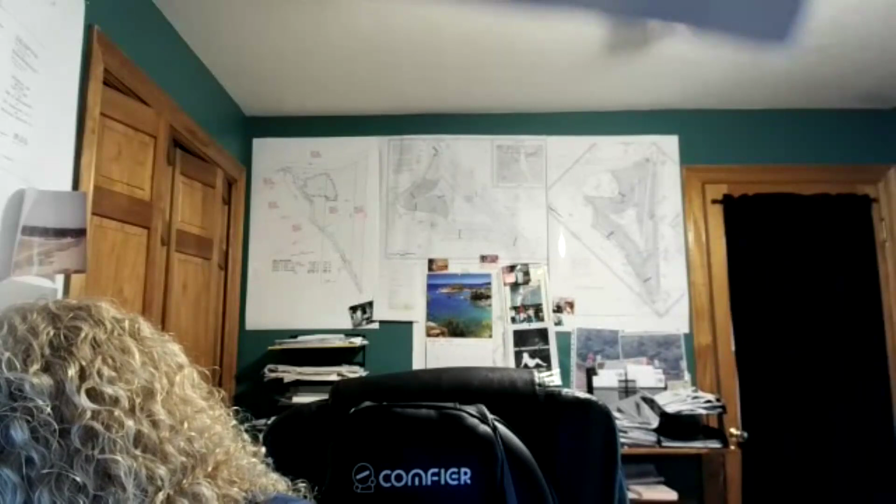The property is identified as Assessors Map 88, Lot 23, 815 Bedford Street. All interested persons are intended to come. They are now legally open, and the bandstand is yours, Wendy.

All right, thank you. So is someone from Silva Engineering on? Who's on tonight, Becca? Someone is on. I shall be someone. If I can take the screen.

Are you like at the beach? Oh, I wish, that's my wishful thinking, you know. I'm stuck at the office. I'd like to be there. That would be nice. It's a beautiful beach, isn't it?

What am I sharing? Okay, my screen. It's been a while. So we are at the corner of Romney and Bedford Street, at the old LeMay's location, okay?

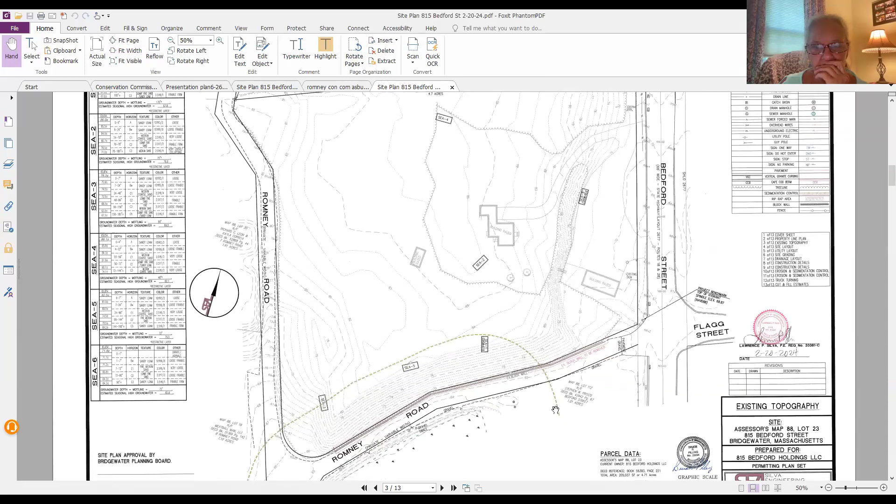We are here because this 100-foot buffer, which is located on map 88, lot 112, has wetlands. These wetlands were illustrated, or borrowed shall I say, from the Concom as-built done for Romney Road. We do not have a recent flag because, well, it's trespassing, and we were hoping the Concom would want to look at it and say, yep, that's where it is. It's right at the edge of the road.

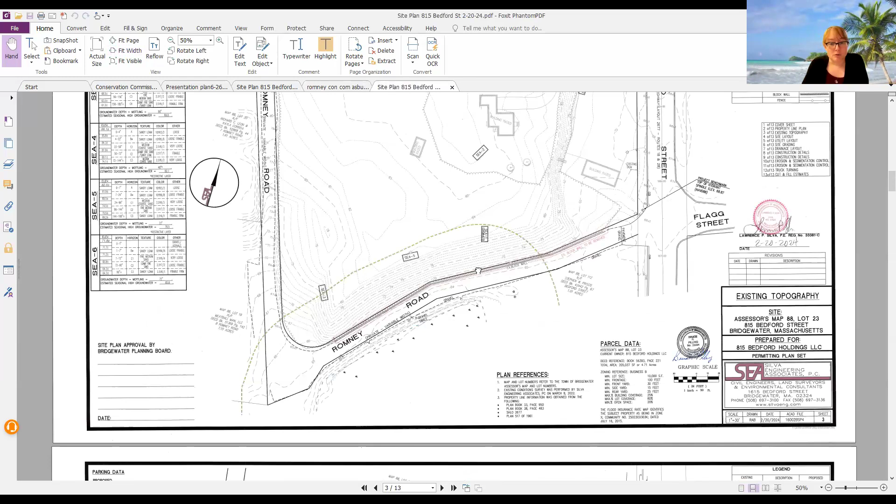Having said that, we came before you because the original proposal was to do a driveway in the 100-foot buffer and some drainage in the 100-foot buffer, and a lot of grading in this 100-foot buffer. We went to planning board, and planning board asked us to make some concessions. So that's off the table. We have now come before you and the planning board with a revised layout. Oh, you know what, I'll show you in color.

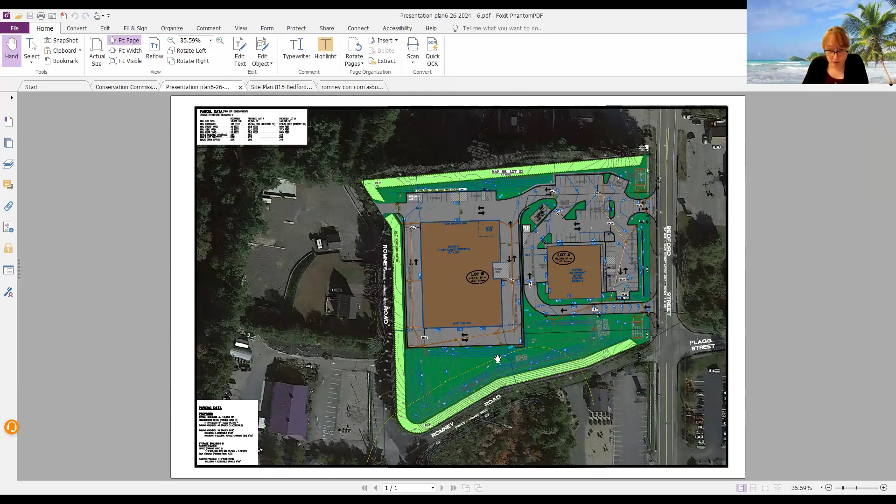Hang on, more like this. So with this layout, we are maintaining a 20-foot vegetated buffer along Romney Road. The wall that's there stays, 20 feet of the hill stays, 20 feet of the vegetation stays, and we now only have drainage work and grading within the 100-foot, and actually more like the 50-foot, outside the 50-foot.

Okay, so back to the site plan, back to the grading plan. Why am I doing this? Because technically we could have just resubmitted with an RDA, but we're not gonna. We're gonna continue with the notice of intent approach.

We have submitted plans, drainage, evaluated by Greg Tanzi, not once but I now have his second review, addressing some of the comments. We need to do test pits for drainage to satisfy some of the groundwater concerns. That is actually scheduled for next Thursday.

I'm here showing you what you got so I can hear your input. What is now just drainage in the 100, outside the 50, inside the 100, or adjacent to Romney Road.

There's a wall that runs along Romney Road, correct? The wall stays, the existing block wall will still remain. The wall is about top of wall 70 to about 76, so 6 feet of elevation will remain. You're gonna go up the hill and then we start tapering down to make the drainage basin.

What was once a 4-building layout back here is now a 1, 3-story building, climate controlled storage. We had a driveway entrance off of Romney Road, we've eliminated that. We had a water line looping off of Romney Road, we've eliminated that. Everything now is Bedford Street.

The only concession I would like to ask is that we use the record wetland that we had, because nothing has really changed much. The road is the edge of the wetlands. That's not gonna creep any further with that road.

I don't really have any questions about that. Do any other board members? That has been there for years now and I don't really have any concerns, I don't think. So she kind of addressed them that I had, and nice redo over with the plans.

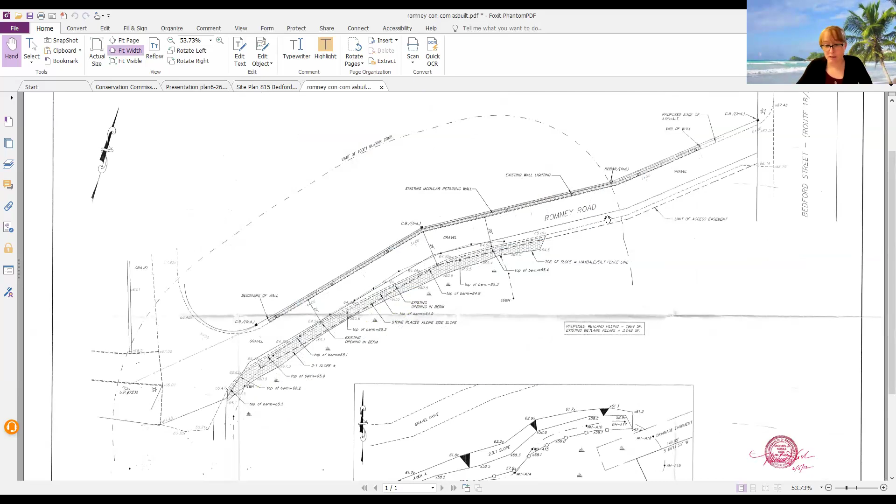So it's an active line, correct? That's what you said, I heard you say? It's an inactive line. Oh, it's inactive, okay. Concom as-built record plan, because that wetland line isn't gonna move anywhere. That Romney Road is the boundary of the wetlands, it's right up against the edge. There's paved swales dumping into it. It's right there. No, I'm familiar with the area. I just thought you said approved, but no, it's inactive. No biggie. So this would make it active, if you get me.

So the next question I have, which you answered - Greg's done the engineering review. This has gone through planning, so you're awaiting the second set of engineering review on him?

We're at the cusp of planning board, I believe. So this is why I thought it was a prudent moment to show it to you and talk to you about it. Not necessarily asking for a vote tonight because there are going to be some plan changes, but I would like a level of comfort that y'all like where it went.

It looks good. No, I have a good level of comfort with it. I like where it went. Just need to review the engineering things and then go from there. I mean, I take a quick eyeball at it driving by, but I like what you did.

Anyone else? Mark, Harry? I was present when the wall was put in on Romney Road, along with some other conservation members, so I like this new plan a whole lot better.

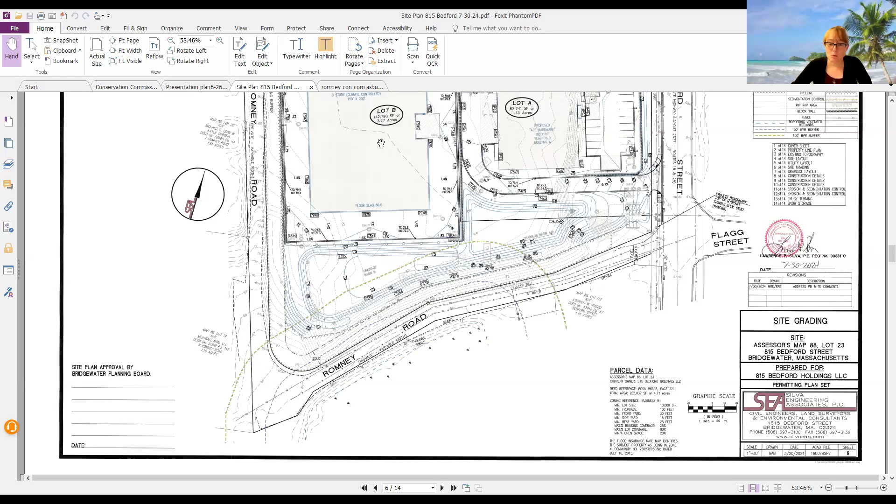Oh, and I will be submitting it. I know you don't have it yet, so this is why you're seeing it for the first time. We're going to do the proper channels of submitting everything to you again as a revision. We just took a little while to get through planning board and satisfy their requirements. And then next plan set, they should be satisfied, I'm assuming.

Fingers crossed. Eileen, are you able to talk? Do you have any questions? Maybe she's just listening tonight.

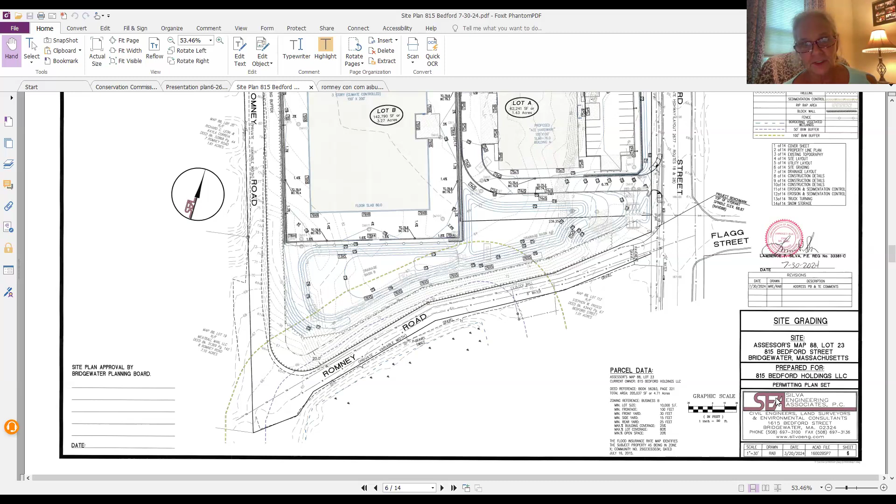I just have a quick question, it has nothing really to do with this. So in the previous plans there was the one building and then 3 or 4 separate units. Is the only parking they have for this just what's on the end there? On this top of the screen?

This is a storage facility, so they're going to have all the drive-up doors that you would normally see. And then this is the loading area in the middle here, so you would have active loading over here away from everything. But storage, they kind of pull up in front of their door, open it up, and off they go again.

The real parking for the office rentals is kind of up on the north side. If there's a couple extras needed, it's there, but for the most part they're just going to park on the side and do their thing. It's very passive parking.

Okay, just curious. Madam Chair, I don't know if you asked Member Peterson if he had any questions. I asked Harry and Mark kind of at the same time. Okay Mark, do you have any questions or concerns? Not at the moment. Okay, thank you.

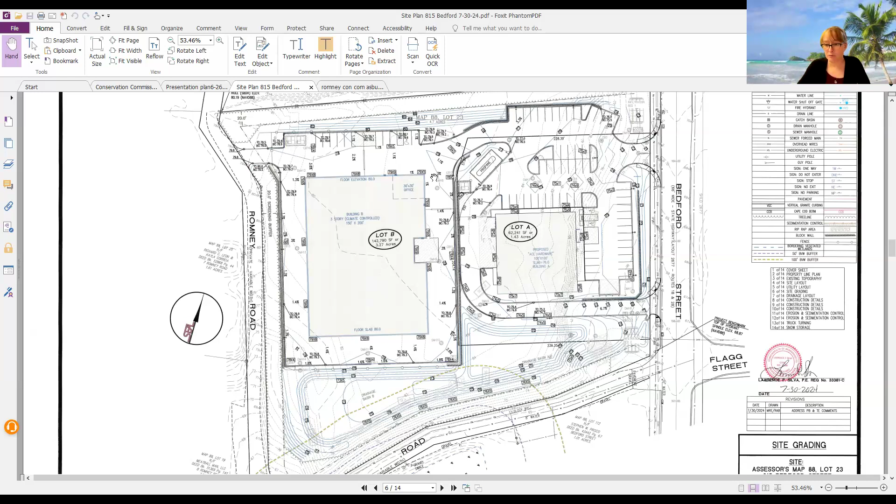So Rebecca, are you asking to continue this? I am, making sure the commission is okay, so that maybe on the 26th, when we come back and they've seen the revised plans, that we can get a thumbs up. But you'd like to continue it tonight? I would like to continue it to the 26th, please.

Okay, so it seems like it appears to look okay on our end. So do we need a motion? Yeah, we still have the public hearing open though. We do still have to check in with anybody.

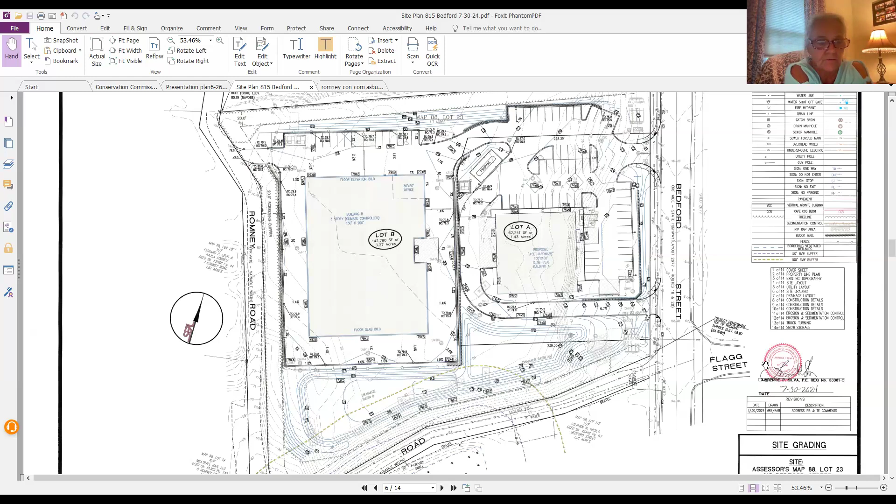Are there any abutters on that would like to ask a question or make a comment? You can use the raise your hand feature on Zoom at the bottom, or you can raise your hand if Mr. Rulli can see you, and he can call you. Let me see. I am not seeing any hands virtually or in real time.

Okay, thank you. So could I have a motion for a continuance of 815 Bedford Street to September 26th? I'll make a motion to continue 815 Bedford Street, map 88, lot 23, to the next meeting, which is September 26th. Thank you, do I have a second? Second. Thank you, and roll call vote: Marilyn, aye.

Harry, aye. Mark, aye. Eileen... and myself, Wendy Smith, aye. All right, thank you. Welcome, thank you.

All right, you're up next too. So next up under old business, we have a notice of intent for 0 and 350 Cross Street, map 118, lot 89, 23, 24, 25. The applicant representative is Robert Vazza, Silva Engineering Associates. DEP file number is SE 116-1550.

So this is a notice of intent, not the RDA that was on us before, right? Do we have a public notice?

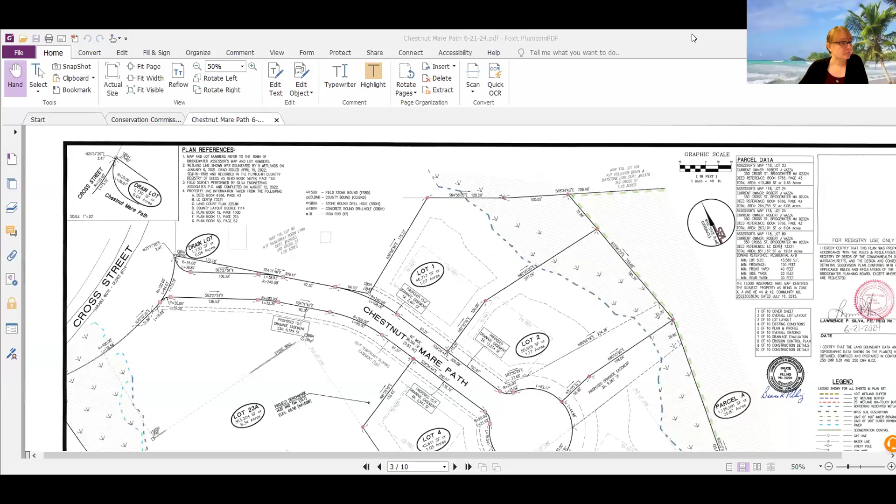So we walked the site, we walked down. I had staked out the headwall, this hundred foot for the stationing, and then we walked down all the way to the back where you saw headwall 8 and headwall 5. There's a, I think we discussed whatever concerns you had at the time.

I had a meeting with the planning board last night. They continued it because we have a few engineering review comments to go through. Most of them were housekeeping in nature, and it felt pretty good, it's just there were a few pages worth of comments to get through.

I don't know where the commission stands or feels about this one with regard to approvals or the next one. I think we should treat it like we treated the previous one. I agree, that's why I was asking. I know we discussed some potential conditions you were looking for, we should probably put them out there now so we can have it on the record.

Oh my goodness, I think I'm unmuted. We hear you. Can you hear me? Yes, oh yay. Oh my God, thank God. Okay, continue on, so we're talking about the...

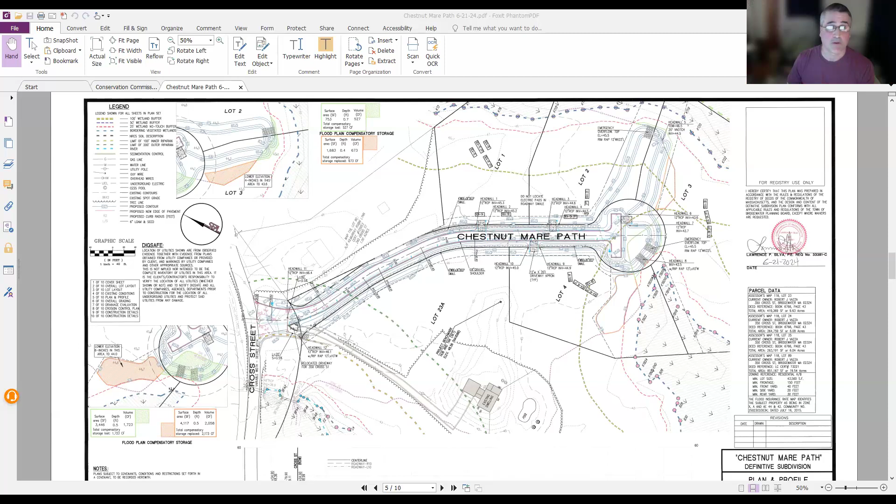Good thoughts, vernal pools are not necessarily shown in here. But vernal pools would be marked on here. My point is they might have been missed because the vegetation was eaten away. They were not missed, I actually made them do calculations and everything. I'm very comfortable with that line. Harry and Eileen, you can also speak on that line, but I'm very comfortable with it.

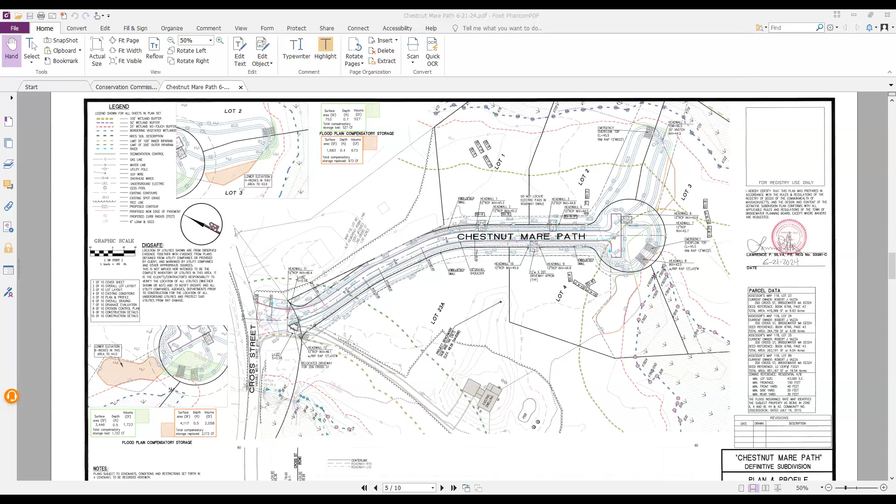We walked thoroughly and looked for vernal pools. There was no snow on the ground, and it wasn't winter. It was cold, but it was not unviewable land. I guarantee it because of the nature of the wetlands.

All right, well, thanks for the thoughts, Mark.

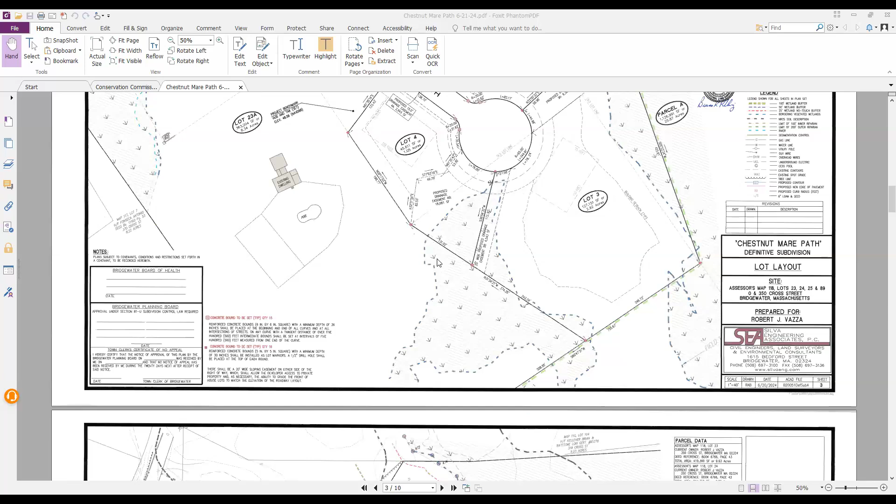I was going to say, I think even further, because this property goes way, way back, and just to give Mark a comfort level, Ken did flag it and he did find interesting things, but they were outside of where we even are looking. So he looked all the way back there and didn't find anything noteworthy for us to put on the plan at the time. Now, if you want to go deep into the woods, you probably will find something interesting, but we don't need to go that far.

But that's not going to be used, hopefully. It's not going to be built on. That's right, not where I saw it though. We didn't walk that far. I was seeing these things on like lot 1 and lot 2. Oh, I'm not saying you didn't. What I'm saying is we were able to view and did not find any findings of any concerns about a vernal pool.

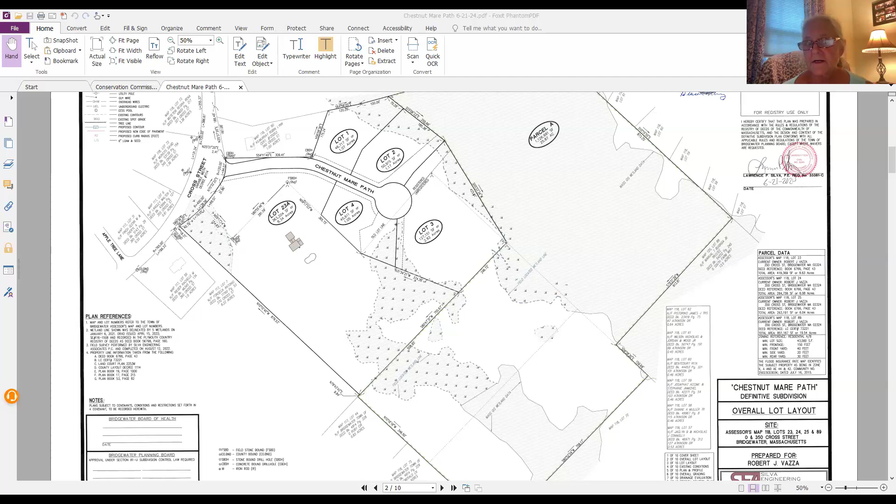Okay, let's move on. Is there any abutters that have any concerns or questions they would like to bring up? If you do, use the raise your hand feature on Zoom or raise your hand so Mr. Rulli can see you. Going once, going twice. I am not seeing any, Madam Chair.

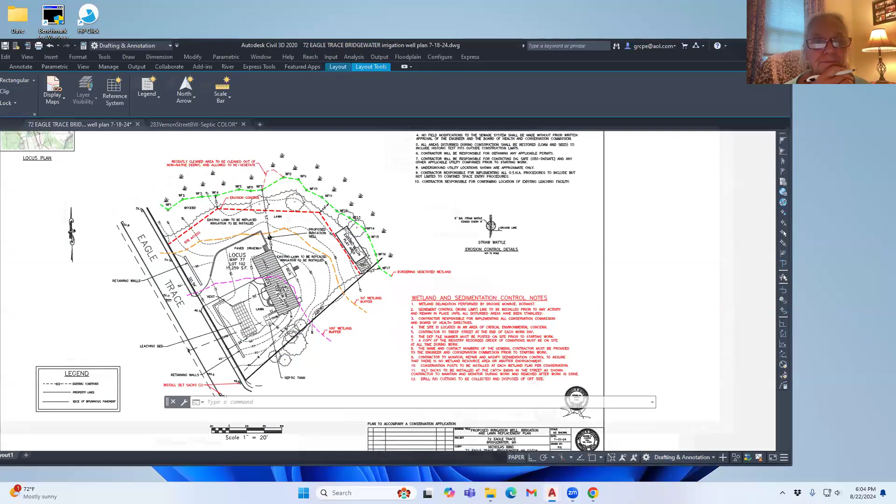And I'll share the screen here so I can bring up some stuff. Okay, let me see, share the screen. The first thing I want to bring up is the plan. Can everybody see the plan? No, we're seeing your desktop. Okay, hold on. There you go. Okay, so this is the plan.

This is the wetland line delineated by Brooke Monroe. This same delineation happened in 2019 for the septic repair. It didn't fall under the jurisdiction of conservation because we had the septic completely outside the 100-foot buffer, shown in purple. But we do have the records of the wetland location. We reflagged it for this application and compared it. It's almost identical, plus or minus a foot or two here and there. The exact same line that she flagged.

Now, the shed here existed in 2019. The only new thing on this plan that didn't exist in 2019 is this little play area, the mulch play area. I don't know when that was added, but it wasn't there when we did the septic repair. I'm going to try to show you, it's online, so I'm not sure it's going to come up for you. Just let me know if you see this.

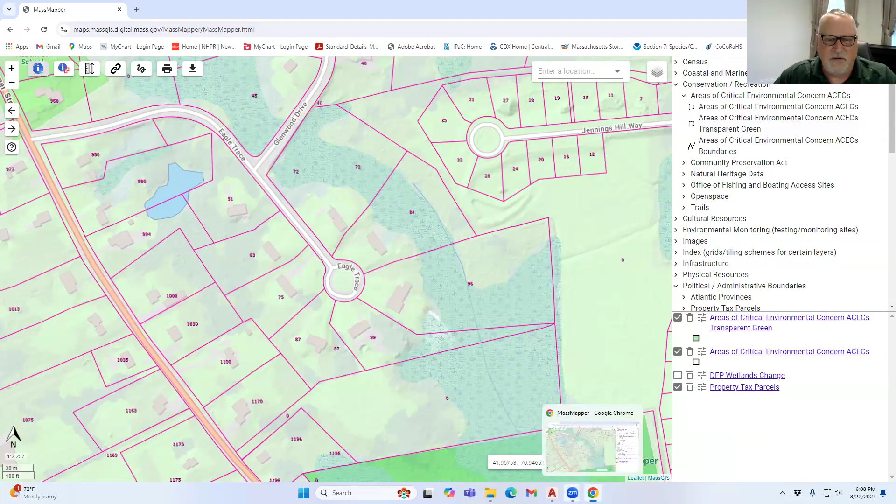So what we're proposing is an irrigation well at the end of the driveway. We have the wetland line delineated by Brooke Monroe, both in 2019 and 2024. This is shown in green. The orange or reddish line will be the siltation fence we're going to propose around the limit of work. The gold is the 50-foot and the purple is the 100-foot buffer.

The idea is to come in here. I've been told it's going to take a couple of days or less to get the lawn changed. I don't know how long it'll take to get the irrigation well in, but I normally estimate a half a day. All the area will be cleaned up from the irrigation well work.

We have notes here that say all the disturbed areas from the irrigation well will be cleaned and removed. The street is to be swept every day, and the silt fence is to be maintained. There is one note here I'd like to point out to the board members.

The property, the site, it says here the site is located in an area of critical environmental concern. It's supposed to say the site is not located there, and I looked that up on Mass Mapper as well today. So I wanted to make sure that if anybody read that, they know the site is not located in an area of critical environmental concern.

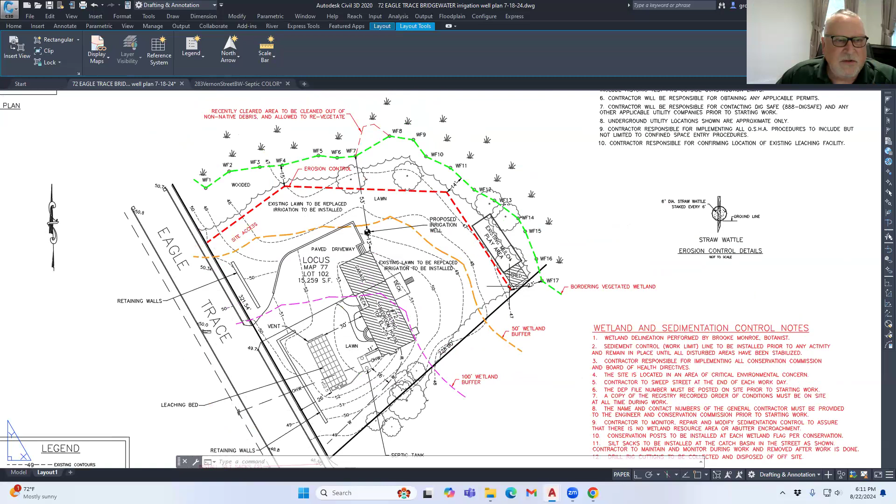Just a couple of things on the plan, and then on your narrative I have a kind of major concern I want to address. So I don't see the 25-foot line - it looks like this is already in a disturbed 25-foot no-touch area, correct? Yeah, we don't show the 25-foot no-touch zone on this plan. This is all pre-existing, pre-existing lawn, disturbed. Yeah, I was using a scale to think.

So then I get to your narrative, and the one thing I'm concerned about is the sediment control system consisting of street sweepings. Street sweepings are a DEP-regulated, contaminated waste - we test it like that. I don't know why we would be using street sweepings, that's definitely a no. Street sweepings are regulated by DEP, they actually have to go to special facilities. So unless you're talking about a different type of street sweeping, this would be highly regulated.

Is it a hand type of street sweeping, just making sure that nothing is at the access points? I want to understand if it's street sweepings that they go and pick up on the streets. No, the contractor is only going to sweep what's in front of the access point. Oh, thank God, okay, all right.

We're not going to do street sweepings filling it with street sweepings, not the machine, just from the access points. All right, that's what I wanted to clear up, because nobody would put street sweepings in an irrigation system. But there will be cars coming in, maybe with loam or hydroseed, however they're going to do it, and we want to make sure those entrance points are swept every day. That was my question on the street sweeping, so thank you.

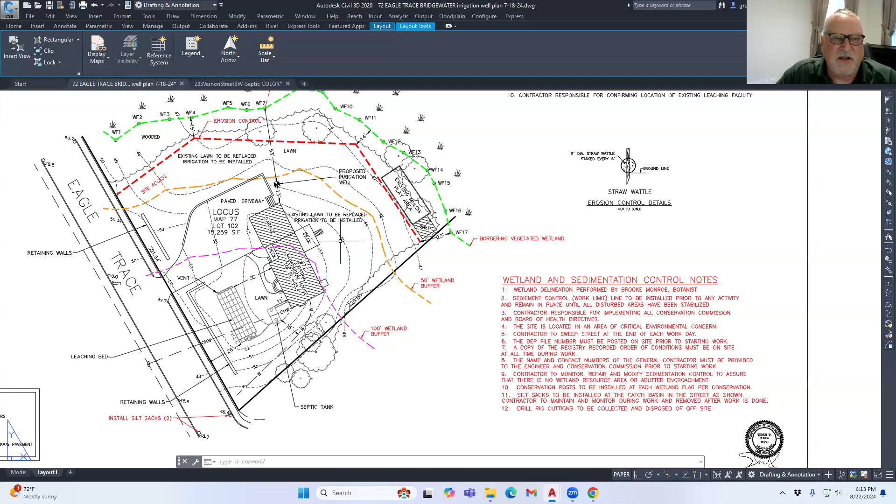It's on the pre-existing disturbed area. In fact, the 2019 imagery shows all lawn next to that shed, just like it's shown here. Lawn is lawn, and mulch is mulch, and there's a shed built, and nothing is supposed to be within the 25-foot buffer. I'm saying, this isn't on you right now for this plan. My thought would be that it's the homeowners, and I'd like to get other board members' thoughts. Maybe I'm talking out of turn, I don't know what I'm talking about, but... I know what you're talking about, and we'll have Harry weigh in big on this.

Whether you guys want to take the play area out, I'll leave that up for discussion. But I think the wetland line - if you guys want to look at it, I'll go look at it. You know, Brooke's a very good botanist. If we did the line in '19, I don't think it changed that much if they're going wetland flag to wetland flag here. But I'll see what everybody else weighs in on. Harry, what's your thought on that one?

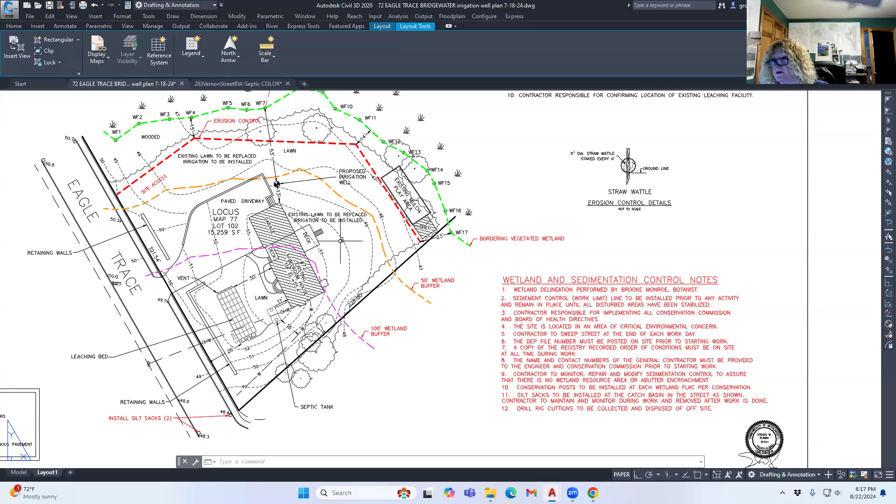When you look past the 50 foot buffer, I think the question is, do we say anything about the mulch area that's there? But good point. Fertilization is not good to be using on anything, it's just bad for everybody. But I hear what you're saying, Mark. The irrigation well will definitely help the lawn to seed. I don't think it will, but to my point, the fertilizer and the pesticides, we should definitely have some language about those. Yep, I agree.

Okay, is there anybody in the abutters that has any questions or concerns regarding this project? David, if you could just stop sharing your screen, please, so I can see. Yep, thank you. Madam Chair, I am not seeing any, and not seeing anything in the chat either.

Okay, thank you. So I guess, as far as Mr. Collins' project, we're looking to make a motion to approve the notice of intent for 72 Eagle Trace with special conditions, or in the order of conditions, that they use as close to natural fertilizer as possible if they're using anything, because of the wetland proximity.

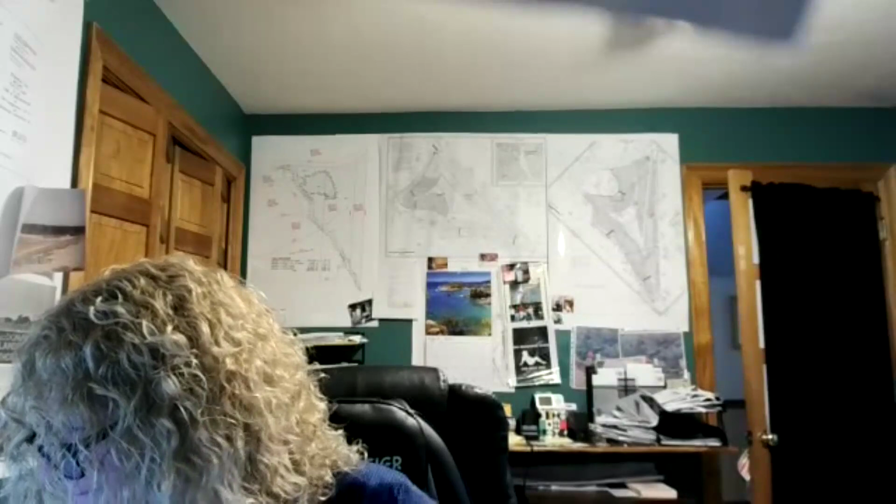So, Marilyn, are you suggesting that we continue this? Well, I'm really all right with it, I just want to make sure the other members are comfortable with it. I mean, the shed's been there, it's pre-existing. I'd like to take a look.

If the shed's been there since 2019, it's just about ready to come down in my eyes. So you could condition it that when the shed is removed, that there cannot be another shed in that location. Oh, I like that. Yeah, I like that. That's fine, yep, not to replace or re-roof or anything.

And then maybe, where her markers are, like say from 2019, maybe they could put up some little PVC so they know where not to put a new shed when they're going to put one up, so that we can certainly condition that. We should, okay, markers too. Little, yeah, but nothing that's going to be hazardous if there's any kids out there, but just some type of marker so they clearly know where that line is going forward.

Could that cause an unintended consequence of them keeping a shed that's dilapidated for way too long? I don't know, sheds don't leak oil themselves, but I think the consensus is you can't make them remove the existing shed, and we just hope that they decide that rather than have a dilapidated shed, they just remove it. But I won't speak for the other members. Yeah, that's my take too. It's been there, they weren't filing to put an irrigation system in, it would be there for another time. It is what it is. Right, right.

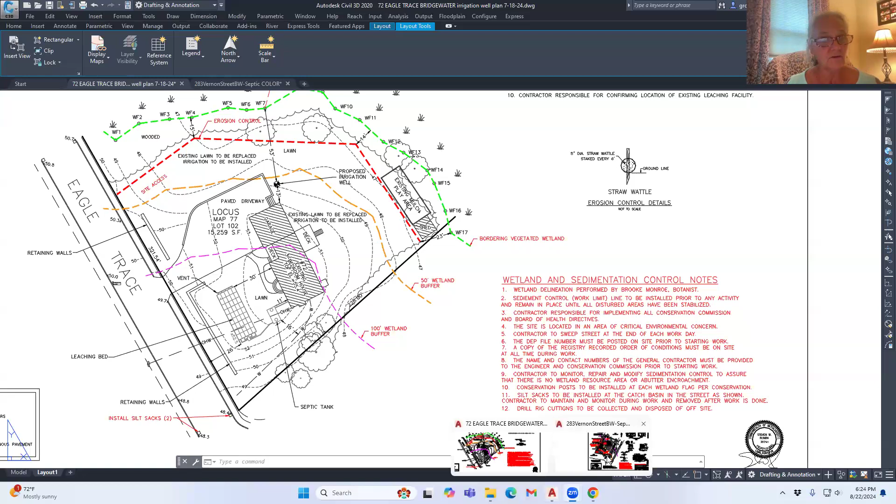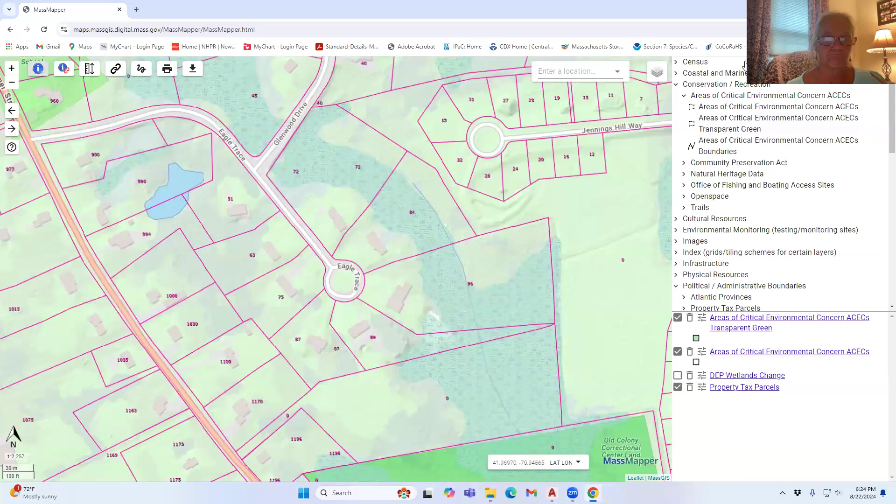I need a new way to be able to put in the public hearing notice. I don't seem to be able to bring it up on my screen. Let me see if I can bring it up here. And abutters were notified also? Yes, that will be on the screen I imagine. Let me see, Bridgewater projects.

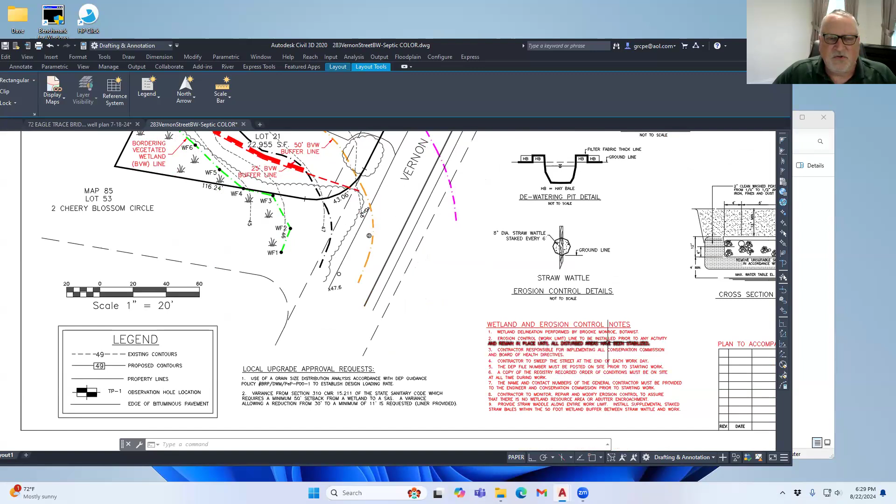There are notes here that just say basically the same thing. We're gonna keep the erosion control in place until everything is stabilized. All the entrances will be through the paved driveway. This is going to be a very tight area to work in, so the stockpiling will be outside the 50 if we need it, but I think mostly it's going to be bring it in and bring it out, that type of operation.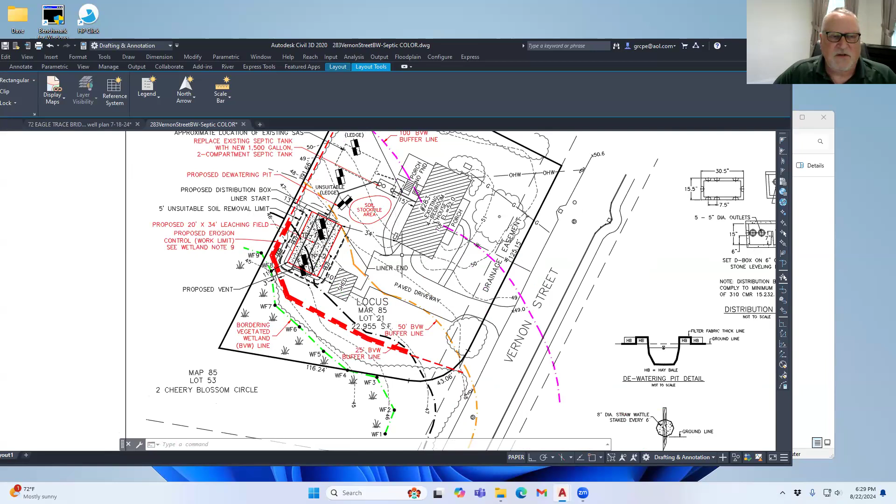We are proposing a new 1,500 gallon tank. Everything has been approved by the Board of Health last week. So I guess that's about it, I can answer any questions. The system will be 11 feet from the wetlands, and the siltation fence will be as close as 3 feet.

Okay, thank you, David. There's no way that you could have turned that perpendicular to the way that it is right now?

No, we were talking about turning it on the side. We have to have both of the pits inside our septic design, and if we turn it perpendicular, we'd only have one pit inside. This is also determined by working inside the 50 -- we're held to a higher standard through the Board of Health to work in that 50. So both of those pits need to be inside the septic system design area, and these are the pits that we're working off of.

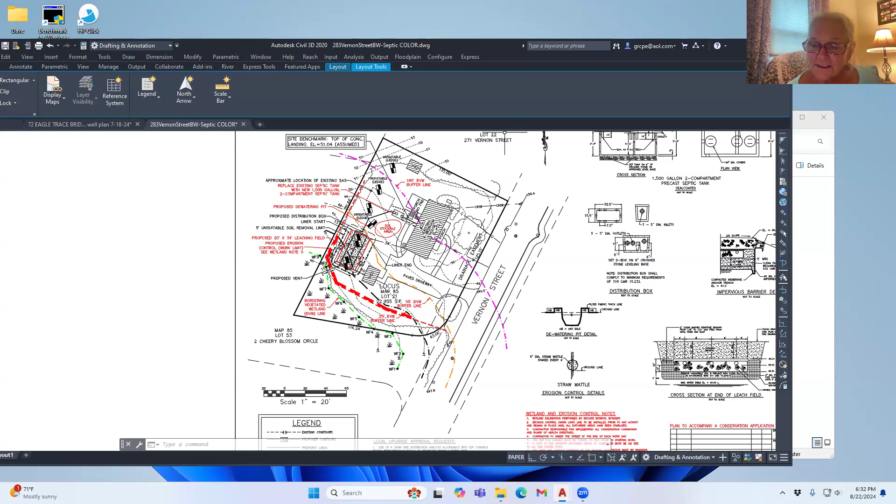I don't see a number on it. I think she's still off. She's still off, Bob. Oh, okay, let me just check real quick. She has left the dance.